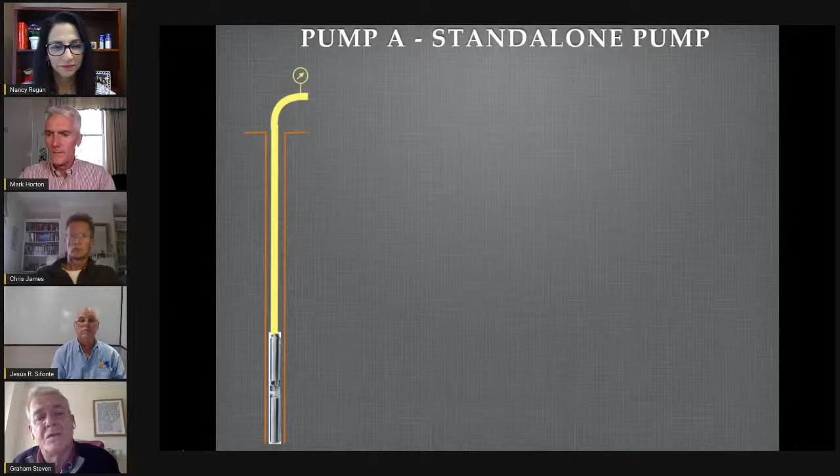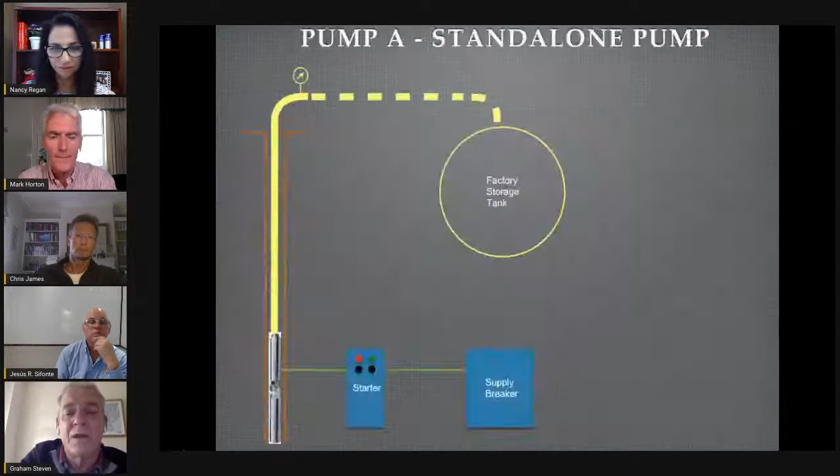Simple system. It's a motorized pump, dropped down a hole something like 30 meters deep, and then it's piped out to the tank. Thank you. And of course, it's electrical, so there's quite a lot of electrics involved. The supply breaker and the electrical distribution and the starter. Oh. Sorry. Hang on, that's all right. And that describes the tank itself. That's all right. We can move on to that.

Good to go? Next, please.

Yeah. So nothing very special about that. And in fact, the whole process is extremely agricultural. However, we produce something like 2,500 tons of sugar every year. No, I might have got that wrong. Actually, it's rather more than that. But anyway, given that the factory is entirely dependent on this water supply, if things went wrong, there was a problem, a big problem, a pounds and pennies problem, if you like, putting it into sterling.

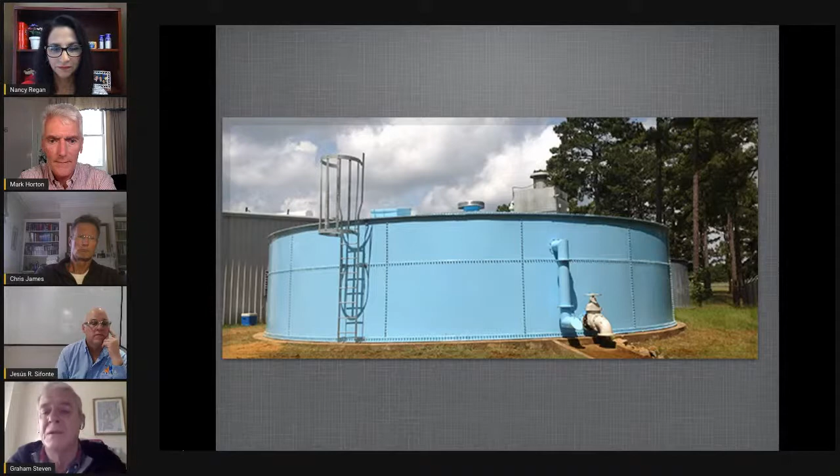Next, please. Oh, right. No, go back. Yeah, one of the things I'm going to apologize for is this is all in PowerPoint, but actually the original file was in Keynote. So I think we've got a few problems coming up with readability, but I'll talk it through when we get there.

Right. If we had carried out an RCM analysis on the borehole pump, it would have looked something like this. There's a function to supply water at not less than a certain rate. I've said 300 liters a minute. I'm not sure that's absolutely right. And there are two functional failures that drop out of that, of course. One, that it doesn't do it at all. And the second one, of course, is it doesn't do it enough. And if you looked at some of the failure modes that one would expect against those functional failures, could we go on a little bit further, Nancy?

Mm-hmm. Oh, right. That's not coming through. Wait, hold on. It might be. No, it's me. Hold on. Oh, there we go. That's it. That's fine. Okay. All right. Sorry.

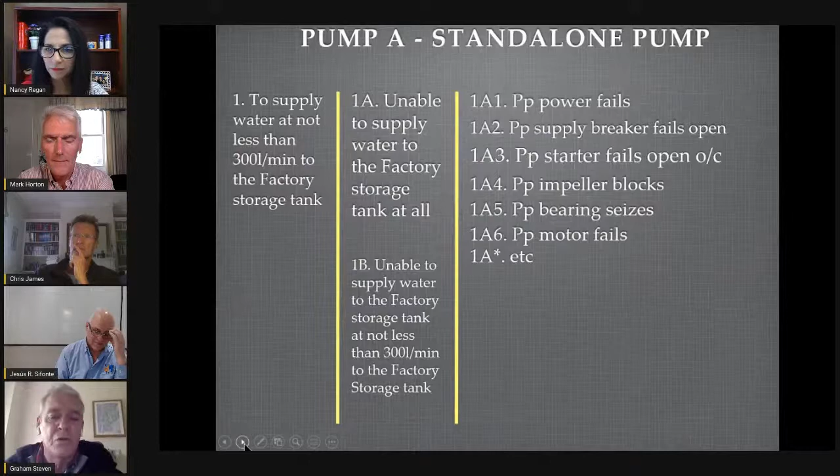That's fine. Okay. So there are a quantity of failure modes which one might reasonably expect to see against unable to supply water at all. And they involve electrical problems, pump problems, pump motor problems, all those sort of things. And I put those there as a for instance, really. And then for the functional failure unable to supply enough or the correct rate, there is one principal one, and that's that there's problems with the pump impeller, usually through wear. Can we go on to that? Okay, that'll do. Stop there. That's fine.

So this would be my putative list of failure modes for the pump, which is standalone. And if you look at the sort of tasks you might expect to carry out on this, can we go through those? They come up one at a time. Yeah, we normally analyze power supply separately, and it usually falls within the functional analysis group of to distribute electrical power. So in this case, we've said analyze separately. Next one is supply breaker fails open, no scheduled maintenance. For similar reasons, the pump starter, there's probably not a lot you can do to forecast its failure or to prevent it. So you deal with it when the problem occurs. So that's NSM as well.

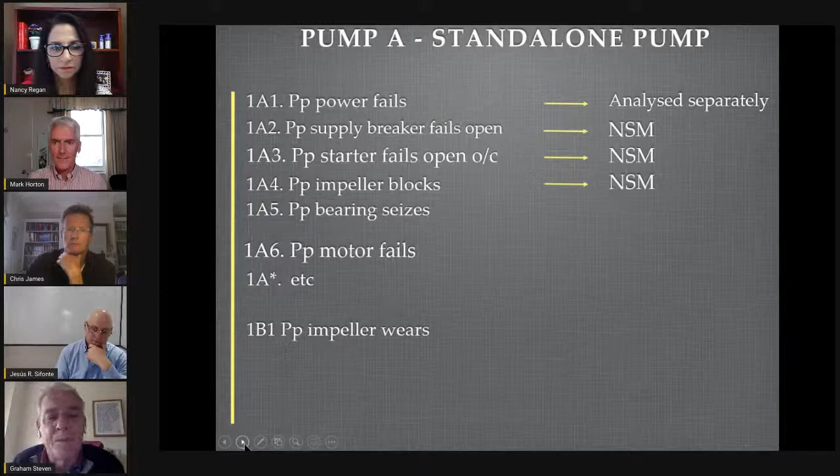Next one, please. Right. There probably is something you could do for the pump bearing. And the usual approach is to deploy some sort of vibration analysis, that sort of thing. The problem is this pump is 30 meters down, so you've got to lift it to do the VA on it, and you would do it at an appropriate interval driven by the P2F interval that you're looking at. I've suggested 3 months. It's going to be of that order. It's not minutes. It's not hours. It is probably a matter of months because it's running in a fairly benign environment. Next one, please. Pump motor fails. Yes, electrical problems, broadly unforecastable. No scheduled maintenance, deal with the problem when it occurs. Next one, please.

Right, and the pump impeller wear is actually quite easy to manage, but it requires quite a lot of organization. What we would do is shut off all the offtakes from the tank I showed you earlier, run this pump and time how quickly the level rises between two known points. And that will give you an estimate of the throughput. And you do that at an interval which would give you sufficient warning to do something about it before the whole lot comes crumbling down. So I've suggested we carry out a pump capacity check of that sort, probably done every couple of months.

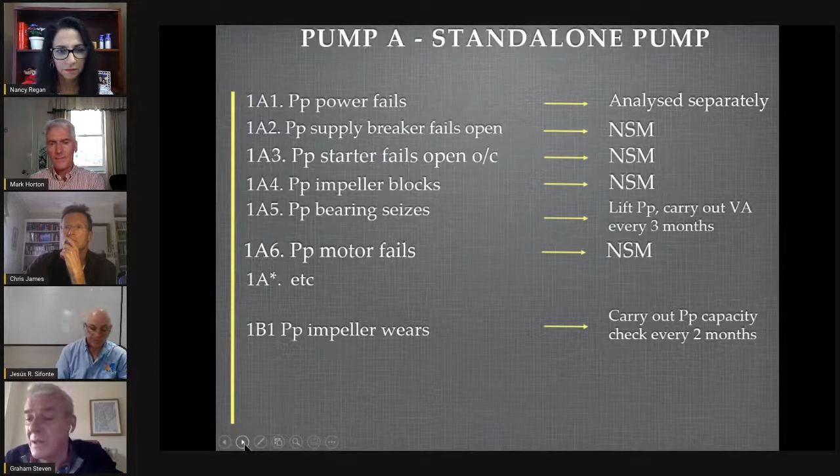This process, incidentally, the sugar process, runs for about 6 or 7 months of the year, and the remaining months is, well, it's an opportunity to pull everything to bits to see why it's working. Sorry, pardon my cynicism. Move on.

It wouldn't be unreasonable then to say, well, we could do with more than one pump because we got all our eggs in one basket. Let's have two. So we'll suppose that we've got two pumps here.

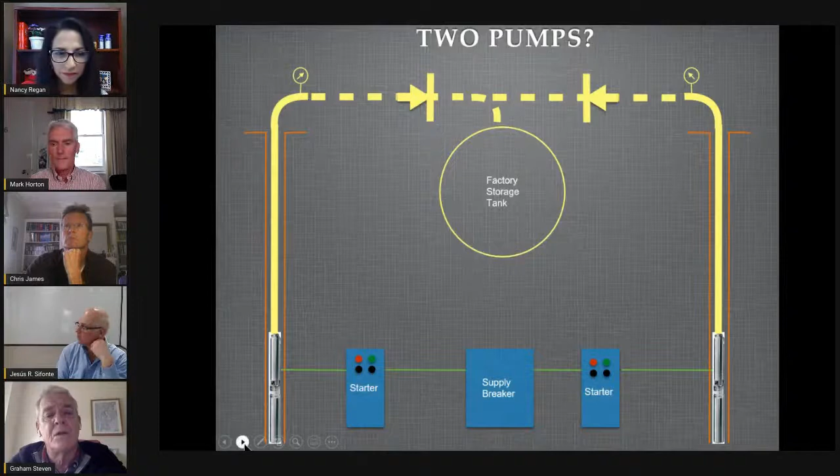And the approach that I adopted, I regret to say, as the electrical engineer at the time, was okay, so we've got two pumps, so we got twice the amount of maintenance. So we'll draw up twice as many job cards in a sort of tickler system that I ran, and that sounded like quite a good idea. I wish I'd known about RCM at the time, because actually it's much better than that. Let's move on.

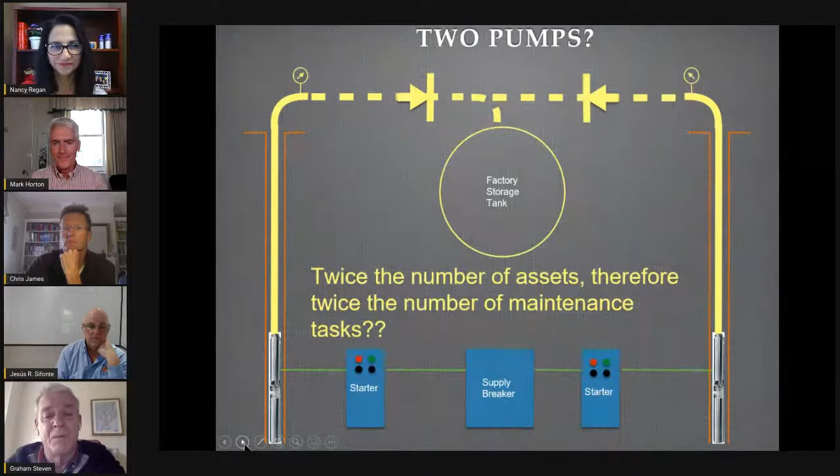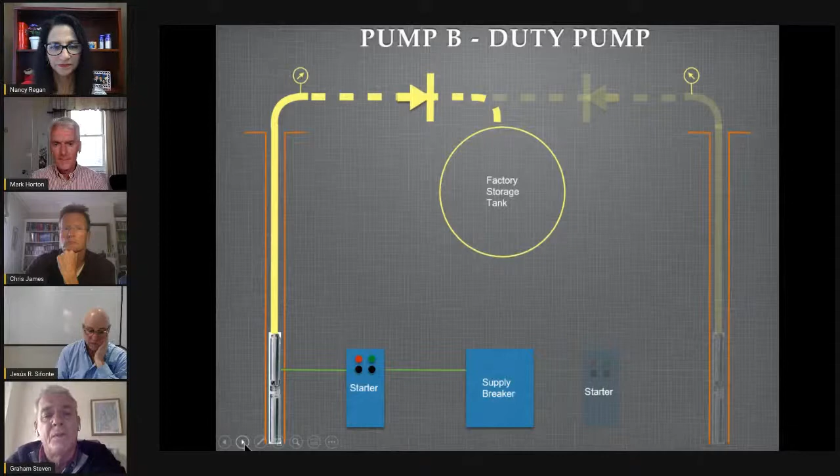So I'm going to suggest that we've got two pumps now, and we're going to use those pumps in a duty standby type of arrangement. So the duty pump looks like that, and if you click on one, the standby, physically the same sort of arrangement. These two pumps are actually about a quarter mile separated, and both of them are about a mile away from the factory itself. So to get people out there and do all these things to them requires quite a lot of logistical effort. Right, can we move on?

Now, if we adopt a duty standby arrangement, do the RCM analysis on that, you'd expect to see the functional failures and failure modes for the duty pump to be broadly the same as for the pump that was on its own. And incidentally, I should just put a caveat in here. I'm only talking about the primary function of the pump, that is its ability to pump. I'm not considering the protection, be it electrical, mechanical, all these other good things. There's a containment issue as well. All of those would also be swept up in the proper RCM analysis. That's not what I'm concerned about here, though.

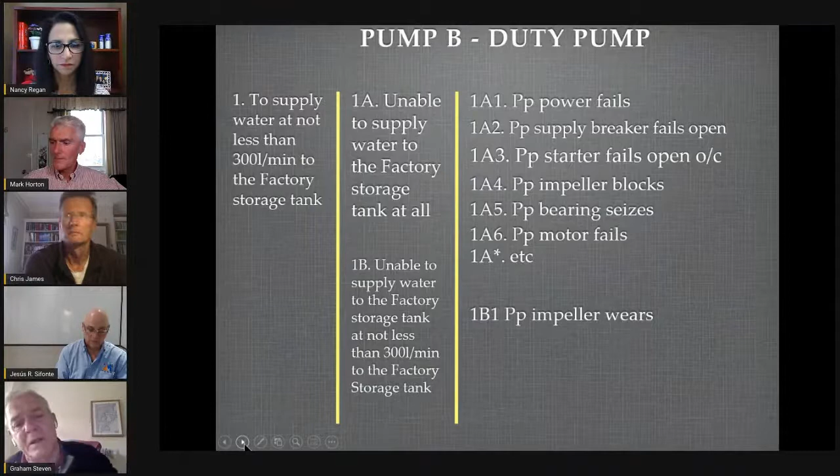Let's move on. And if we look at the tasks, now these need to be brought up one at a time, please, Nancy. Analyze separately for pump power failure, as before. Supply breaker fails open. Again, nothing we could do about that. No scheduled maintenance. Ditto pump starter. Pump impeller blocks. Again, broadly unforecastable.

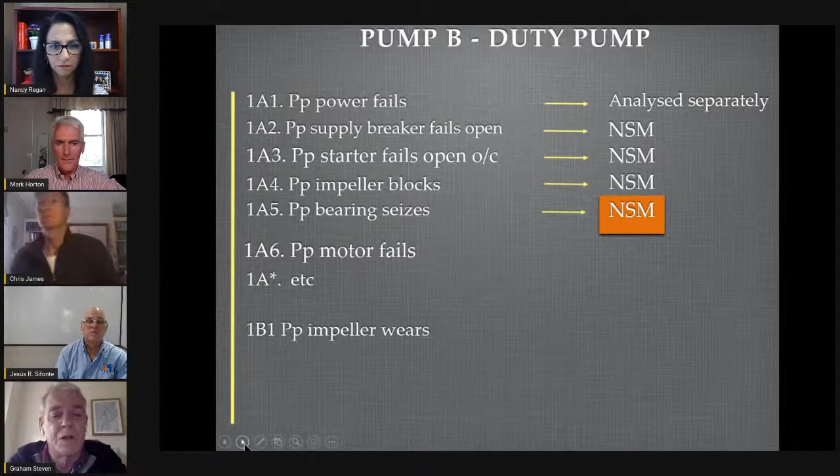Pump bearing seizures. If you remember, we said before that we'd lift the borehole pump and carry out a VA on it. It's not really worth doing that now, because if you have a problem with the bearing, all you do is you switch over to the standby pump and then you lift this thing and fix the bearing. So no scheduled maintenance for that.

Move on. Pump motor fails, NSM for the same reasons as before. And then when we come to pump impeller wears, again, we find that it's not man enough to sustain the factory's requirements, so we run the other pump and we lift this one up and we fix the pump impeller. So again, no scheduled maintenance. So in summary, for the duty pump, it's pretty well no scheduled maintenance all down the line. Next slide, please.

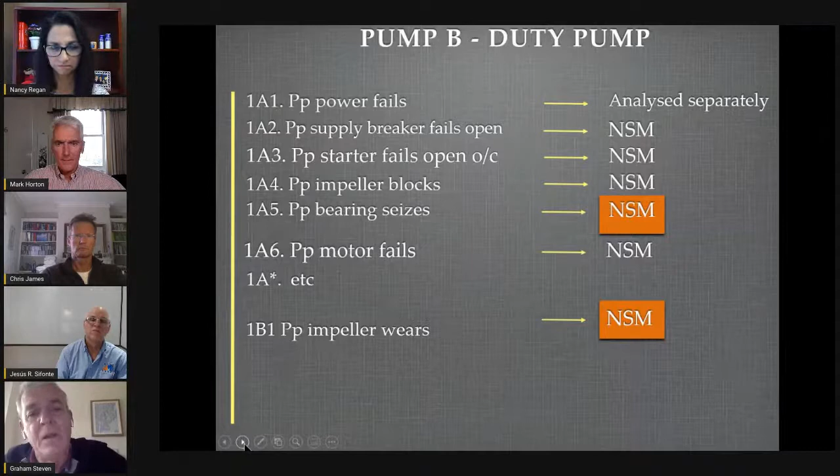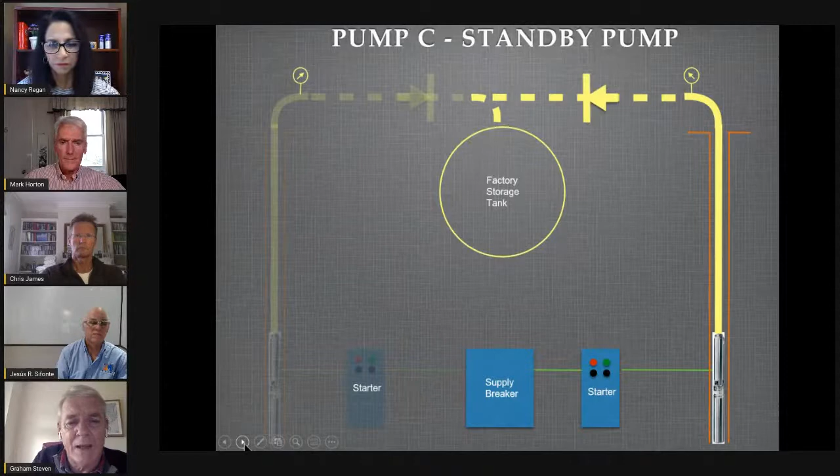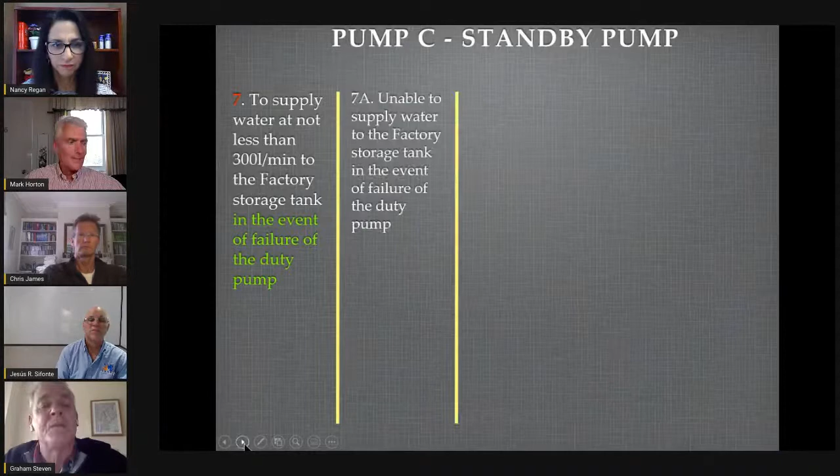In contrast, if you look at the standby pump, I've gone blank. Go on, next slide. Thank you. Right. If you carry out an RCM analysis on that, the initial part of the analysis is going to look something like this. It's to supply water at that rate in the event of failure of the duty pump. It does need to be predicated on that.

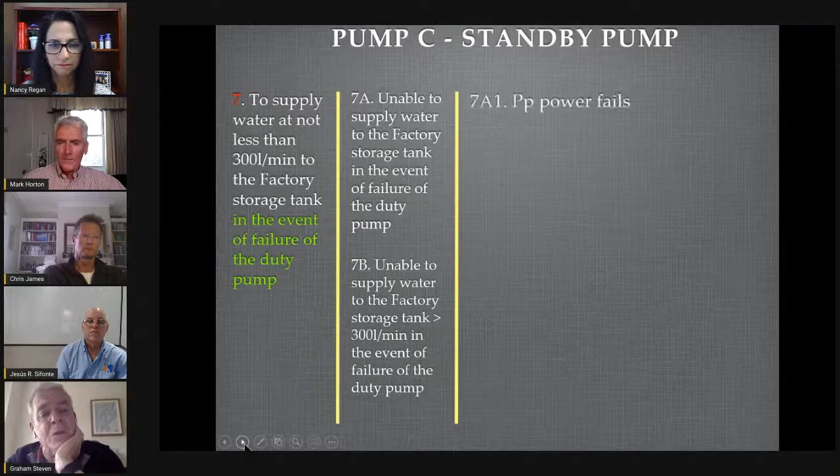Functional failures, unable to do it at all, in the event of. And the second functional failure is 7B. I've assumed it's function 7, it's not necessarily that. 7B, unable to supply water in the event of. All right, let's look at the failure modes again. They look broadly the same. Surprise, surprise, the failure modes are not that much different from the other, because it's the same sort of pump, operating in the same sort of environment, just being used differently.

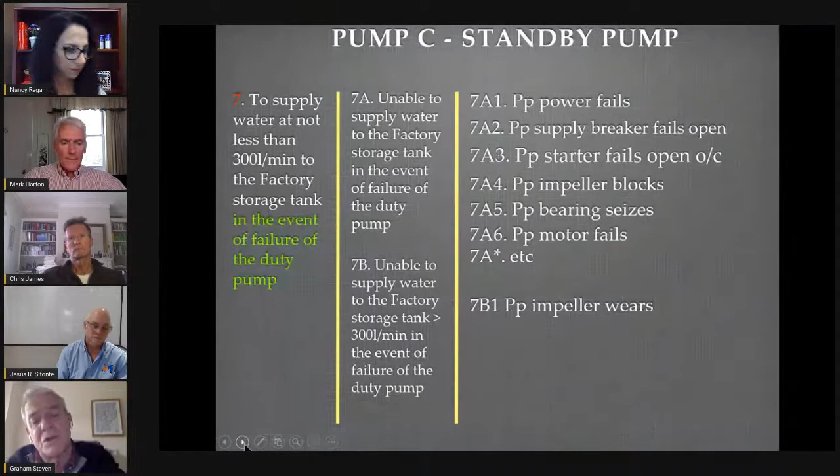Let's look at the tasks then. Analyze separately as before. Right, 7A2, pump breaker fails open. You wouldn't know about it unless you went and checked it. So we'd carry out failure finding on it, the failure finding task, to see if it's still okay. Same with pump starter. Next one, please. Impeller blocking. Well, yeah, we can run the pump, see if it's blocked.

Pump bearing seizes. Well, this pump is rarely used, so the bearing could seize, possibly through lack of use, but I'm talking about pump impeller wears through, because of being used. That's less likely, so I've suggested that's not plausible. Next one. Failure finding for pump motor fails.

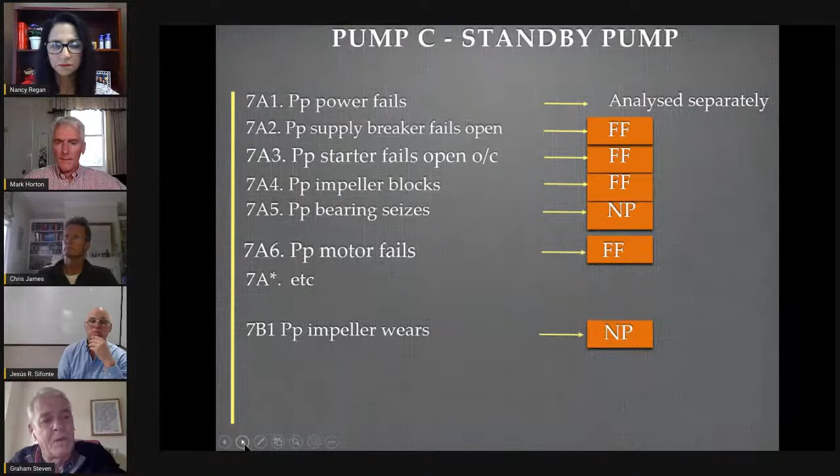And the impeller wear is less likely if the pump is not being used or not being used very much. So next slide, you'll see that all of those boil down to failure finding. What we do is just run the standby pump periodically, and I use the term periodically advisedly. We run it to see if it works, and then if it doesn't work, then we obviously deal with the problem itself.

All right, can we move on?

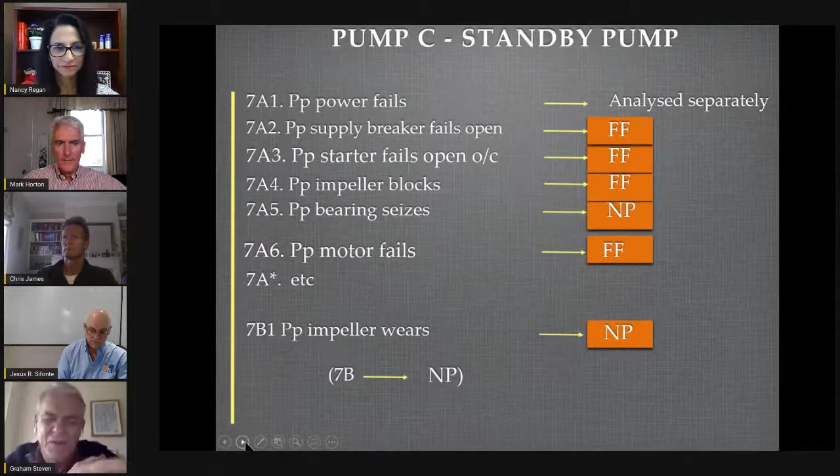It's probably worth pointing out that if the only failure mode in 7B was pump impeller wear, which is not plausible, then the whole functional failure is not plausible. Well, there's a surprise. You could probably assess that when you're doing the RCM analysis and at the functional failure stage. Okay, let's move on.

Right, this is where the tech is going to catch me out. I like this example, by the way. It's known in the RCM fraternity as the 3-pump example because it illustrates some really important issues. Can we first move on to the first slide? Or the next slide.

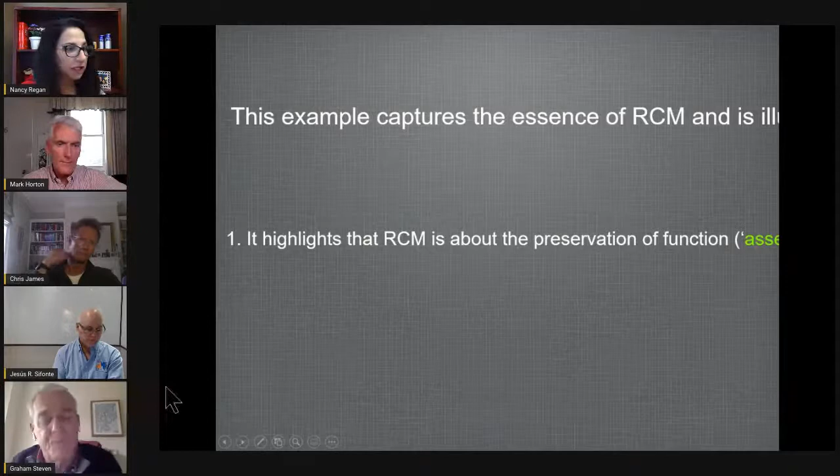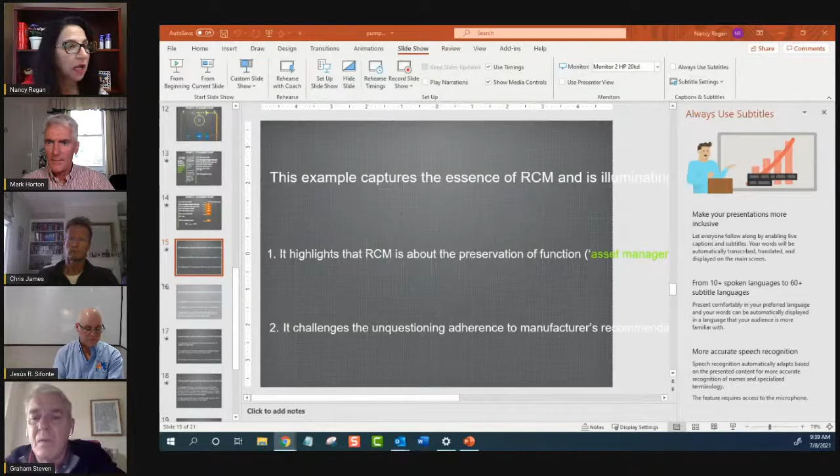And if we want to pause for a second, I can open up the revised version. Do you want to pause for a second, Graham? Oh, the revised version, the one I've just sent you? Yeah, I have a fixed file. Can we pause for a second? Yes, okay. Because this is a natural break. Yeah, absolutely, it would be a great moment to pause. Number one, to mention if anyone has any questions, please do put them in the chat. But also, Graham, you mentioned a few things to me that really rings a bell. So number one, I'm doing two things at once here. So let me open this and then I'll give my thoughts.

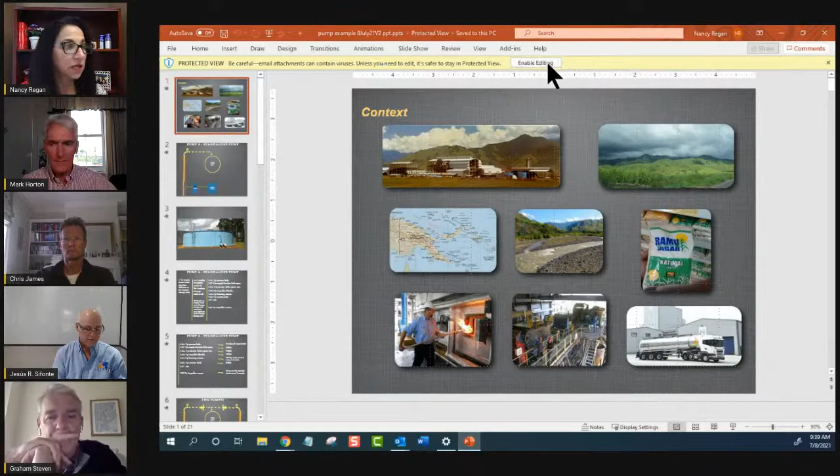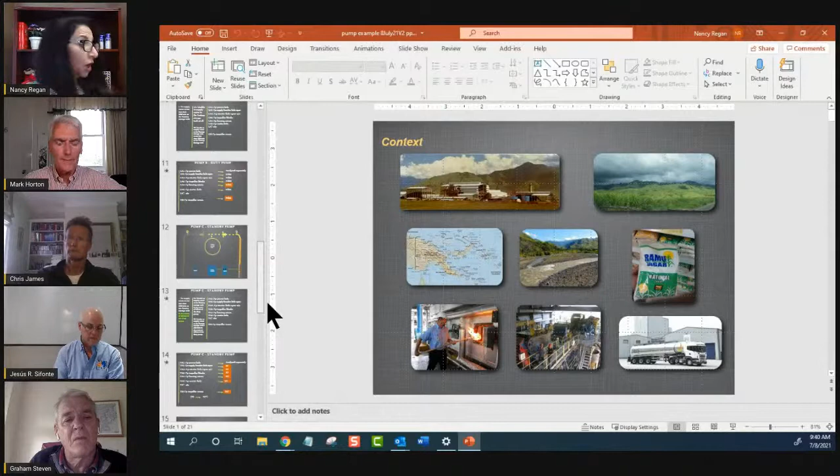Number one, you've used terminology like P-F interval and failure finding. This is obviously RCM terminology, and it's just another reminder to us that reliability in general, reliability-centered maintenance has its own language. And so it's very important that we understand the process, and not just the people who are doing analyses, but also people who have to implement the results and live with the results. It's important that they understand that language too. And the other thing is, which I think is what you're getting to now, is the essence of reliability-centered maintenance and consequences. So a pump is not just a pump is a pump. It depends on, consequences can be different.

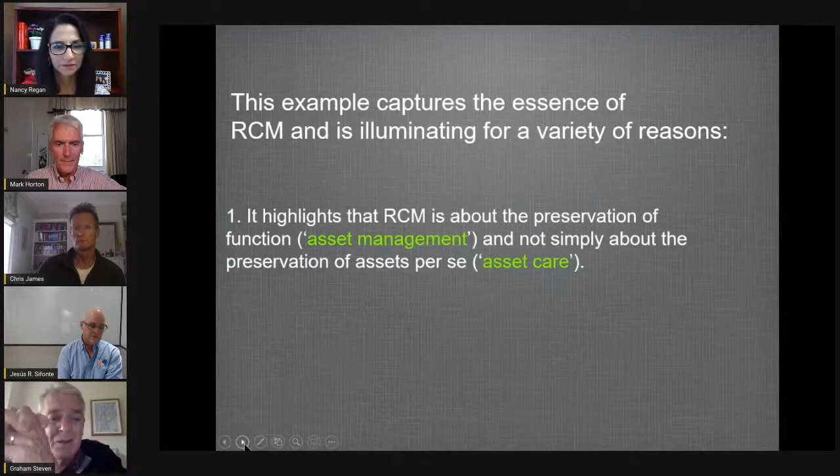All right, the first issue is that this example illustrates that RCM is about asset management and not necessarily about asset care. We make the distinction between those two. I mean, clearly, if we're talking about the running pump in the situation where you've got two, the duty pump, you're not doing anything to it. So you're not doing much in the way of asset care, but you're doing everything in terms of asset management.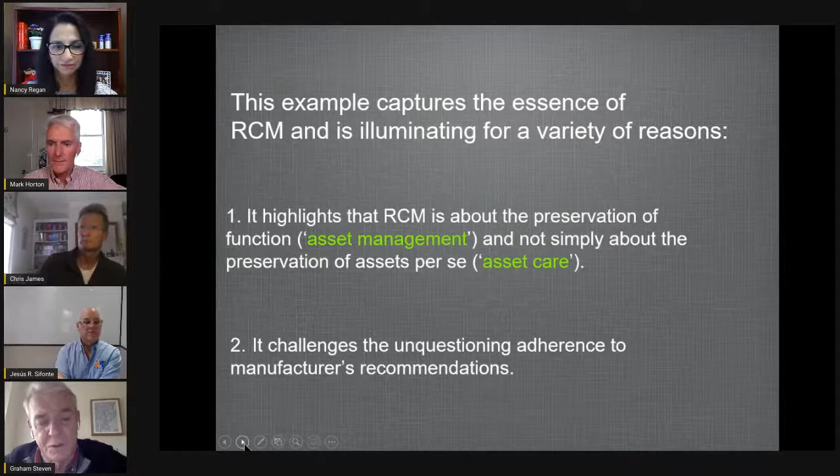Okay, next one. There's often a thought that, well, a pump is a pump, and what you do to this pump, you'll do to that pump, because that's what pumps need. That clearly is not the case. And we've got three examples: the standalone pump, the duty pump, and the standby pump have got different maintenance, simply because the consequences of failure are different.

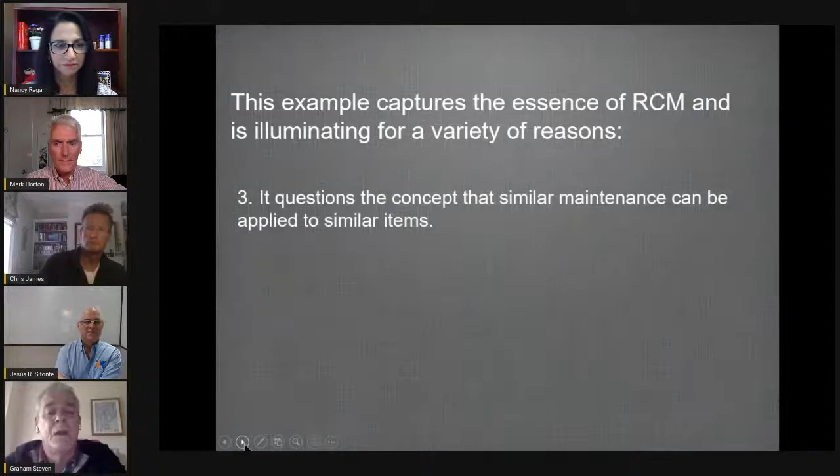Okay, next one. So therefore, you have got to apply some form of formalized consequence evaluation before you can say, yeah, this task is going to cut the mustard. We need to think about it. We need to decide whether or not that is true. It's a systems engineering issue, this. You've got to look at it in the whole. All right, next one.

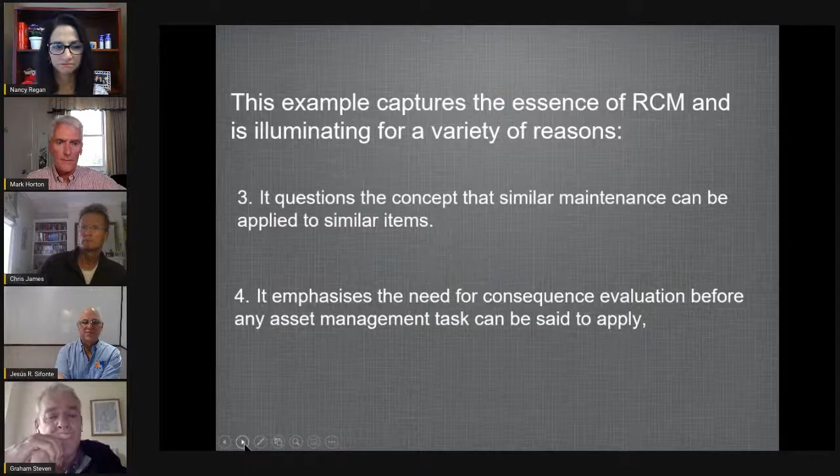This highlights the opportunities for more cost-effective deployment of resources. I've come across so many organizations where they pull things to bits just to see why they're working. It seems such a waste of time. One's got to ask why is it being done. Much better to do it only when it's needed. Most electrical engineers would say if it's working, leave it alone, don't dive in to upset an otherwise stable system. For the RCM aficionados, that's all about failure pattern F, isn't it?

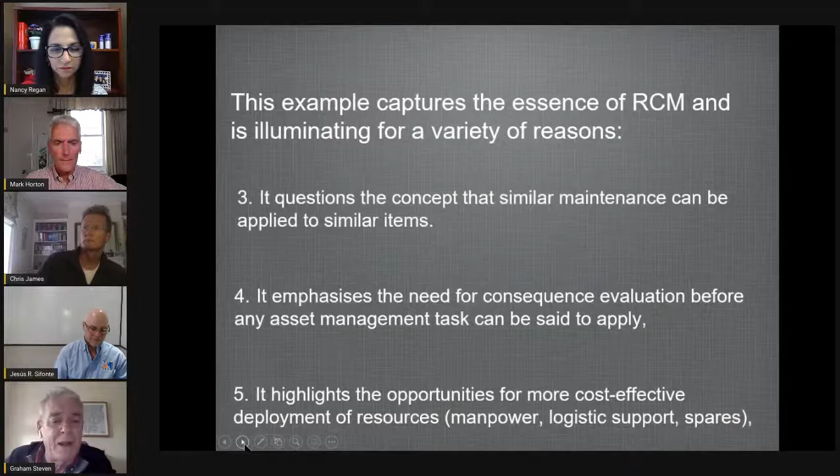Next one, please. Rather a lot of writing here, but this is about dealing with so-called default tasks, that is, no scheduled maintenance and scheduled failure finding. You have an opportunity for lumping things together. So in the case of the duty pump, I showed you about half a dozen failure modes, 1A1 to 1A6, and they all ended up with no scheduled maintenance. So you could actually say, well, the whole pump is NSM. That would be a valid way of dealing with it.

Conversely, if we're talking about failure finding for the standby pump, we've got a whole series of failure finding tasks that need to be done. If you could do them at the same time, simply by flashing up the standby pump to see if it works, you're doing a single failure finding task. In our case out there in New Guinea, that failure finding task would have been done by the production department. So with a monetary hat on, that's good news, because it doesn't come out of your budget as the maintainer, it's being done by the other guys. So there's lots to be said for it.

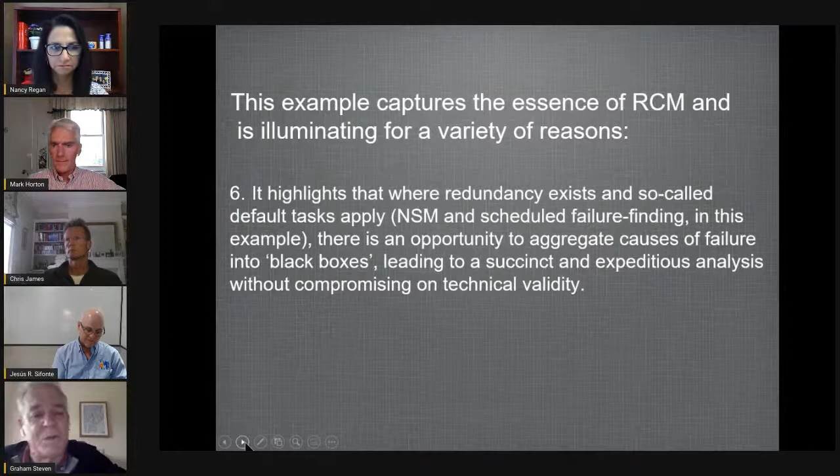Next one, please. So many organizations with lots of redundancy adopt an odd-even day regime. In the bad old days when I was in the Navy, the first job at the change of the watch at midnight was to swap machinery states over: half the machines would be shut down, the other half flashed up again. We were running an odd-even day regime. If you think about it, all you're doing is applying the same, or broadly the same, consequence of failure to both. So you're in for quite a lot of extra maintenance effort.

Whereas if you adopt a running-standby regime, with this running and standby pump I've been describing, for the running pump there's nothing to be done—only deal with problems when they actually occur. So that costs nothing. And as I've said, checking the standbys periodically is done by someone else, and they have to pay for it, not me. So that's got to be a good thing for us. It's a rather parochial view. Right, next one, please.

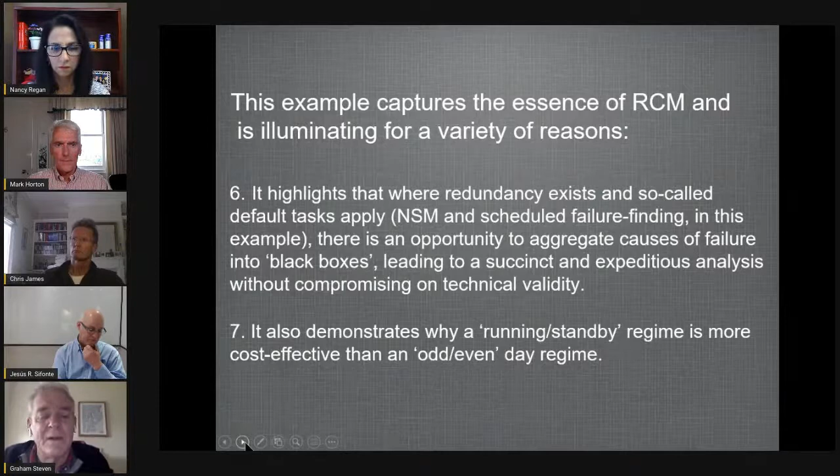I think this needs thinking about. I've said the standby pump would have to be run periodically, and I was choosing my words carefully, because how often you run it depends on a variety of factors. One is the reliability of the pump itself, the other is the reliability of the other pump. And the third variable, quite often overlooked, is how much risk you're prepared to take that both of those failures have coincided. If you're able to quantify that, it's very easy to come up with a failure finding task or interval—the task itself is simple. It boils down to the statement that this risk is entirely manageable, dependent on what level of risk you're prepared to put up with. Okay, next one, please.

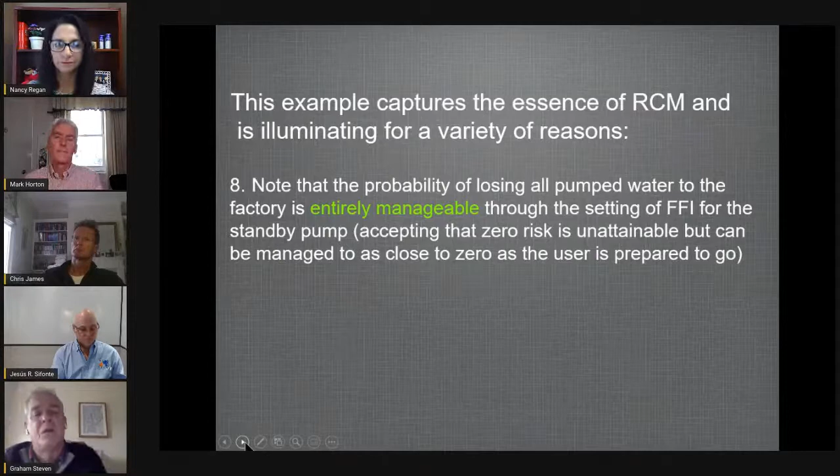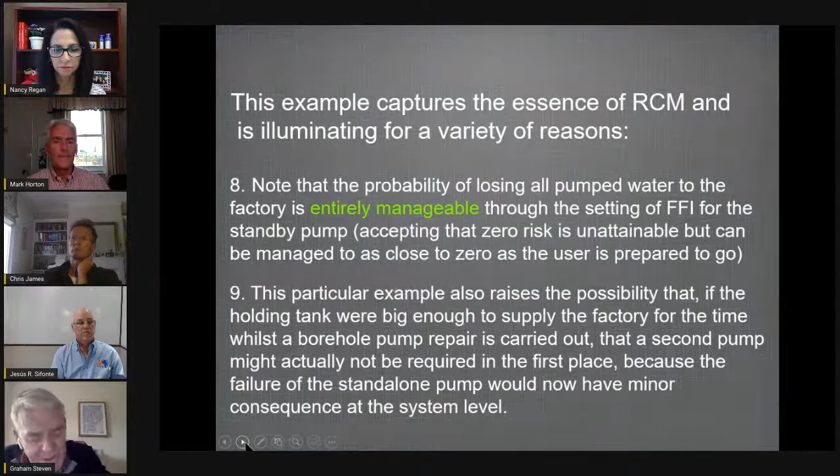I put this one in on a rush of blood to the brain. Of course, if you were a designer, you might be tempted to say, let's have a bigger tank. That would be quite an enlightened way of dealing with it, because a bigger tank could cope with a greater degree of failure before the factory stops. I doubt that's ever taken into account in the design process—I know for sure it wasn't in our case, but it's something to think about. Which leads on to a derivative of RCM that John Moubray was working on, called reliability-centered design, and this would be one of the issues taken into account. Brilliant, let's move on then.